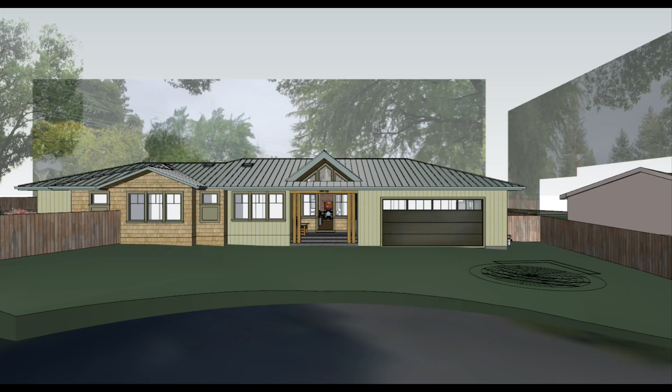I don't think there's really much different to see up front here because we did decide to keep the garage door centered on its wall, which I really appreciate. I have added windows at the top line of the garage. I think it looks really nice. And with this amount of light coming in through the garage door now, I feel...

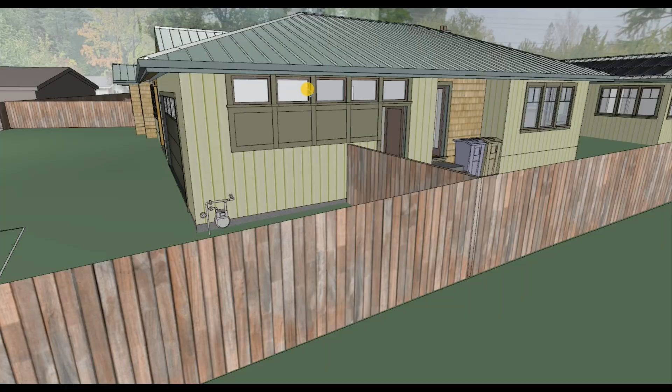like perhaps I went a bit overkill on the windows over here on the side. So I think I will probably reduce or eliminate some of these windows.

Yeah, definitely at least this one. So if we get rid of this one 32-inch window, these all should move over 16 inches to still stay centered, more or less.

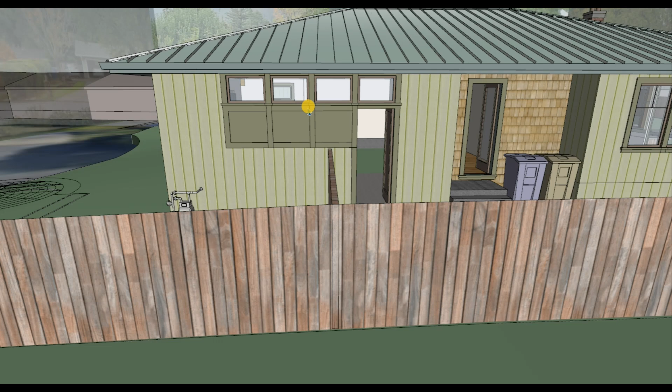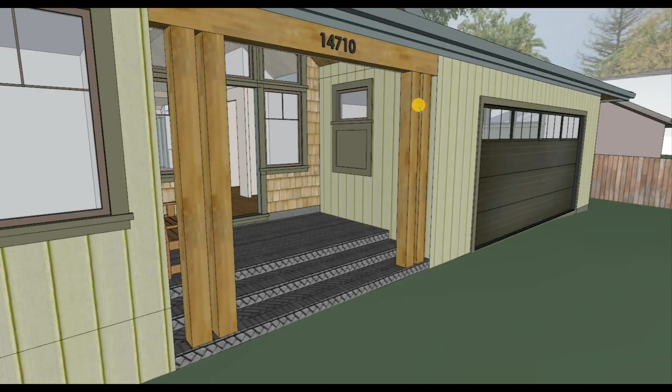So we'll have 4 windows there and 4 windows along the top here. I like that, and we still will have—again, maybe this is overkill. I will say now that we've got windows at the garage door itself, I don't really feel like I need to have a window here.

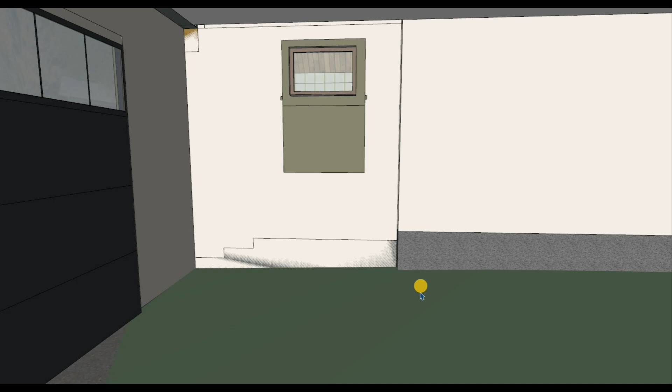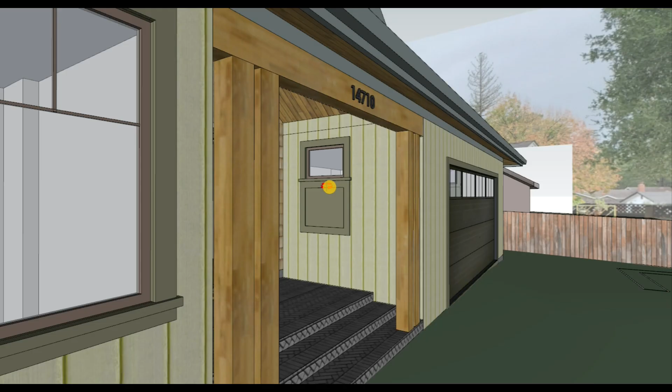You can be that lucky family that has a brightly lit garage, no matter even if the garage door is closed. But if you wanted just to have a solid wall there, that's doable. But for now, I'll keep that window in, unless you ask me to take that out.

I'm so excited about this approach. So nothing's really changed here, except for the fireplace is moved up to accommodate the other fireplace down below, which we'll talk more about.

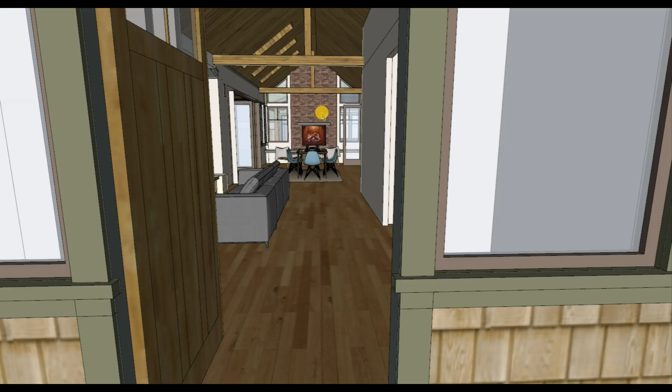But isn't that just a fantastic view? I'm really excited about that.

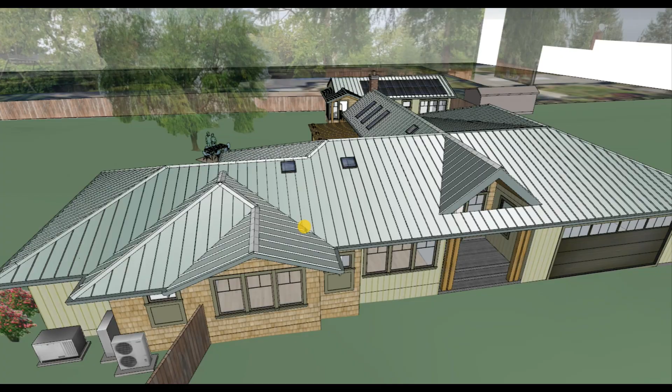Up front, we're also seeing the skylights. I neglected to add these in during the first iteration, but now I've got them in. Due to the roof geometries and me wanting to illuminate this hallway here with some natural light, I do think it's appropriate to have the skylights on the front-facing roof slope.

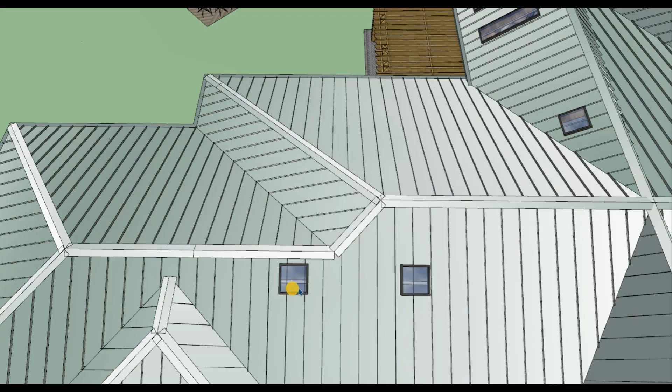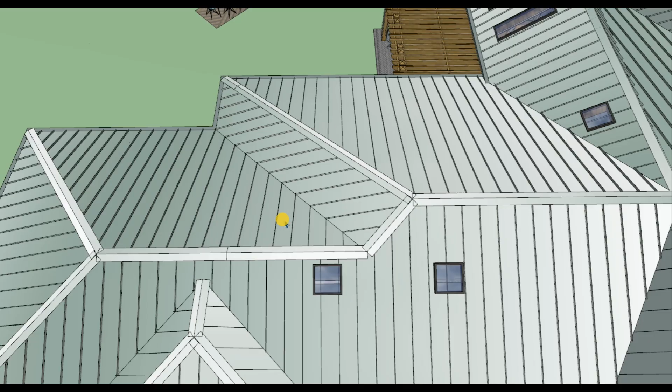I would have preferred to have them on the back, but then the geometries were going to be really weird. This skylight's right at the end of the hall, and I can't really fit it in right here, and I don't want to angle over to this flat area here. And then that angle would be different from this skylight being over on this roof slope here.

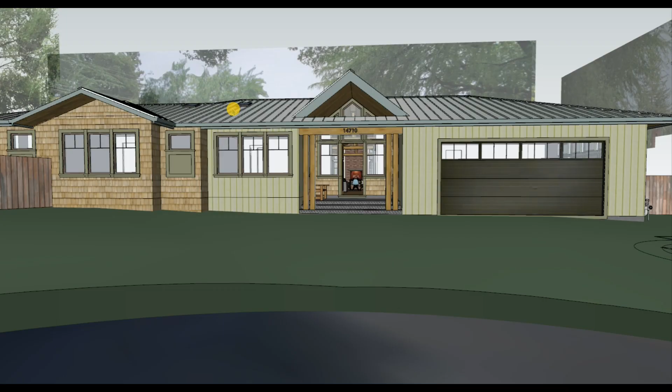So again, I think it's just going to look cleaner in the hallway, and it'll look right just to have those two skylights here. And I think once we see a tree here, a feature tree right here, I think we'll obscure those skylights, even at twilight hours where the hallway's lit up and you can see the bright spots on the roof plane. It's something I try to avoid, but I think it's the right spot...

for that hallway. Coming around on this side of the house, nothing's too different here. I've added a few bushes just to obscure the mechanical area behind your son's bathroom and your bathroom here.

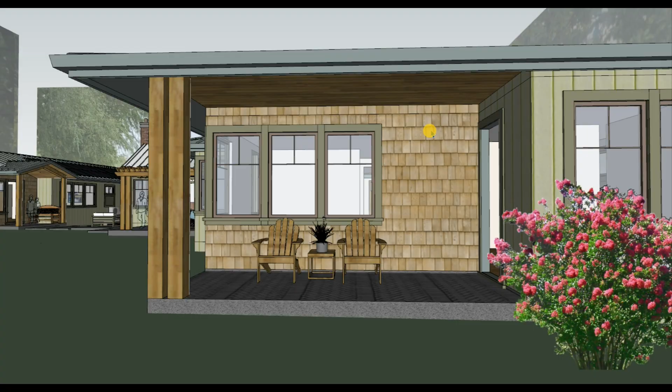I did eliminate the door from the master bedroom to the balcony. It feels like a shame to me. I get that you can get out here through the bathroom, but I just really don't want you to have to only go through the bathroom. I really wish we would have that door here still.

But if we opt to get rid of the door, I think doing a window arrangement like this will be really fantastic.

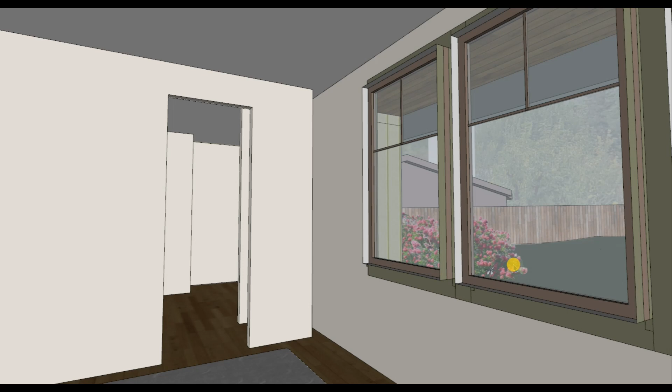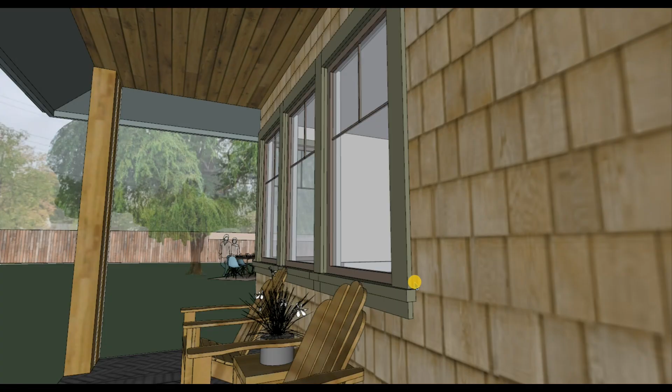And then I've closed off that door here to your office. But again, man, it's such a shame to not be able to get to this balcony other than through the bathroom. But here it is, if this is what you really prefer. It's not too much of a problem.

Now for some really exciting changes. So we're seeing the ADU in the background. We will get to that.

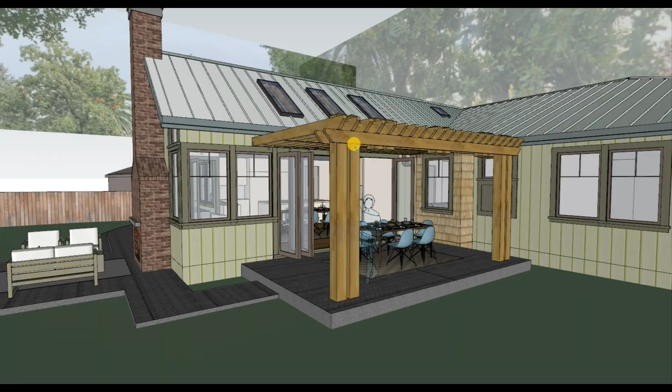But first, let's talk about this pergola request. I think this is fantastic. I think it's really nice to add this to the space for the dining room.

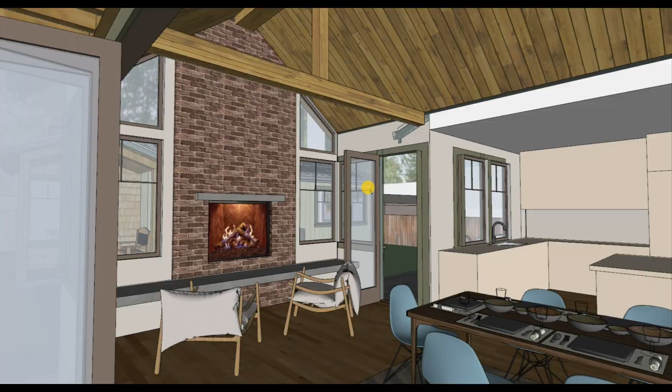And I am showing the reduced size for this fireplace area, just the corner windows meeting the door to the barbecue patio, and then the corner windows meeting at the bifolding door, still centered on the skylights.

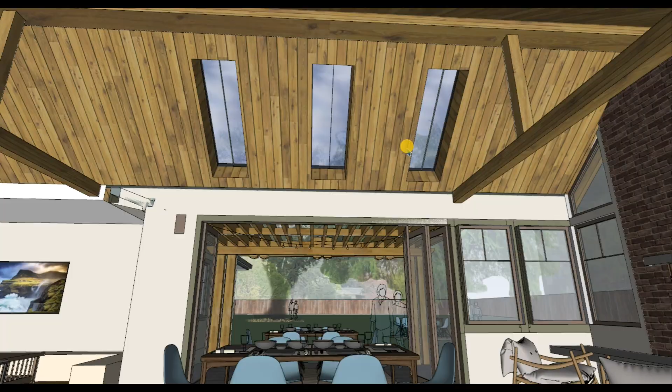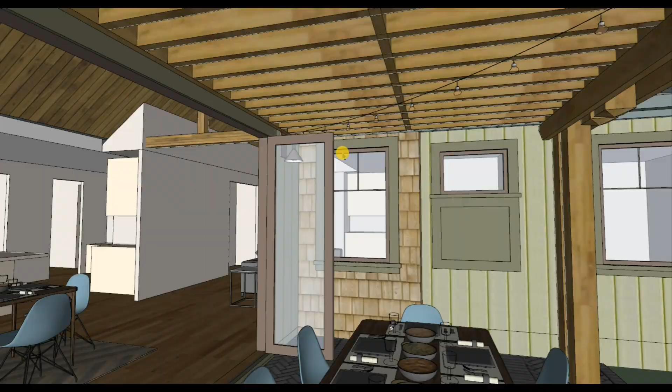And I really do think it's nice to have this pergola space out here. And I really do think I like the bifolding doors for you.

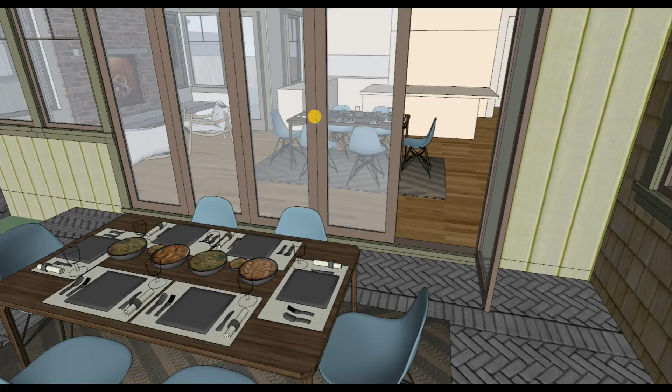I know I gave you in the email quite a bit of a rant about the ratio of glass to frame and how relatively narrow these doors are relative to the sliding glass doors. But to be honest with you, all things being equal, this looks fantastic to me still.

This is perhaps a bit busier than the alternative, which would be—let's see if I've got it here. I do, good. Here's that sliding glass door. It's maybe a little bit in the wrong position now that I've smushed things in. But a sliding glass door does have narrower, slimmer profiles for the frame, and the panels themselves are wider.

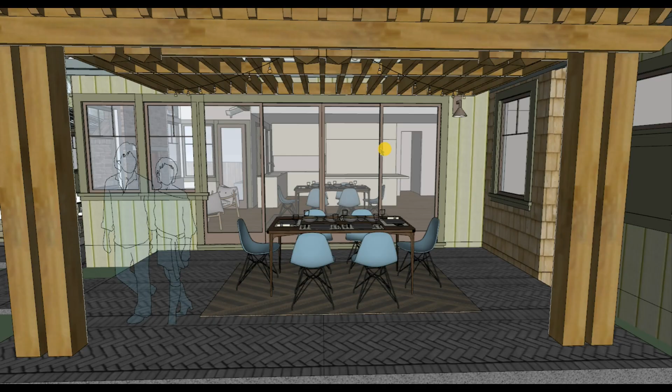And so this is just a lot more glass. But to be honest with you, the other option looks pretty good to me. I'm surprised how much I liked it.

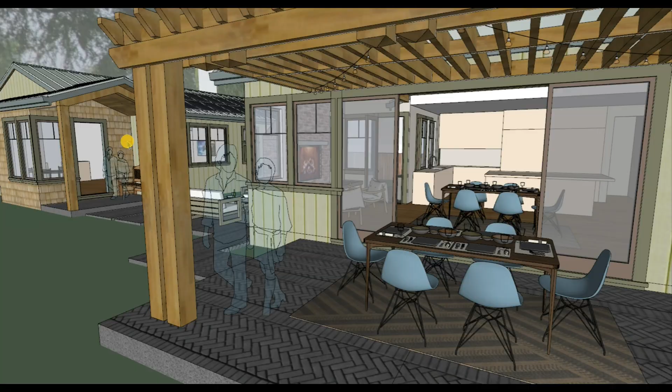And so the sliding glass door is still here if we want to look at that live together. But again, I think I'm really excited for you guys to try out this NanaWall.

Now, there is still this thick stack of panels that do collapse at 90 degrees. It collapses into a flat stack over here. It's a bit of a bulk, but it's not so much in the way. You've got a big enough patio that you'll be able to get past that. I do really like it, and it's great to have this one single panel here that you can swing open.

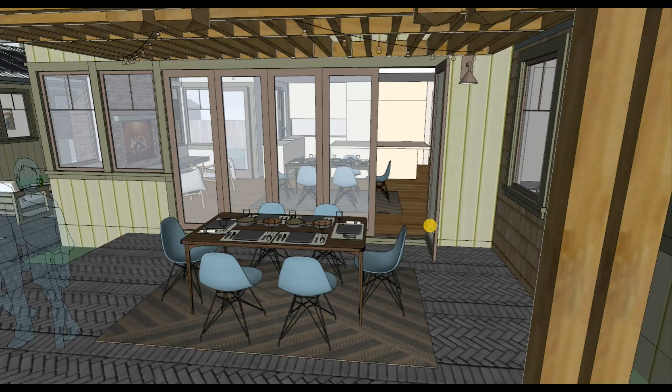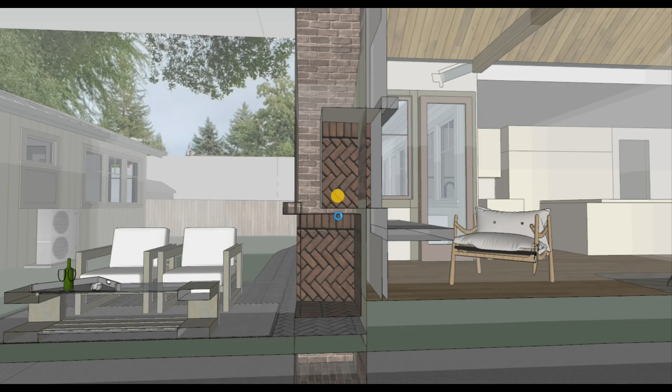And then, the idea of putting a fireplace below the other does seem allowed. I didn't see anything in the installation diagrams for this fireplace that seemed to preclude being able to do something like this. I'm showing the zero standoff option for this upper one, although the lower one - and again this is really getting into the weeds here - but it does seem doable to stack the fireplaces.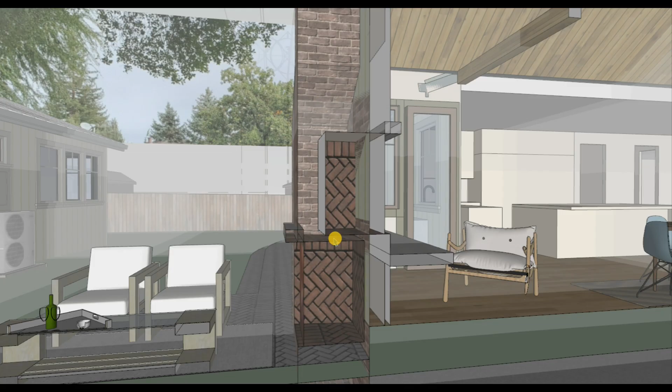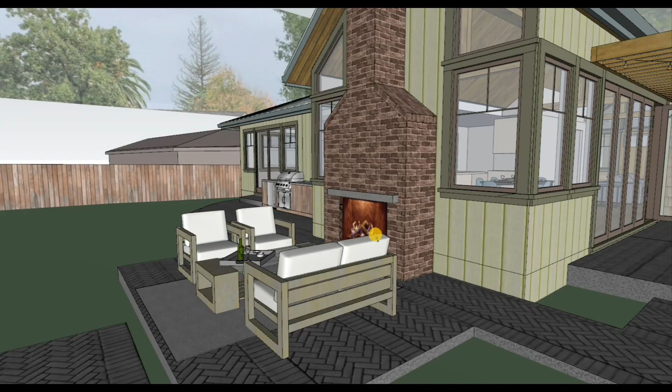Maybe this upper fireplace will have to move up further if I've misconstrued how the venting has to happen. If the vent has to come out the top, then we'll need room to divert that over to the side and route up and around this other upper firebox. But I think I'm digressing a bit. I think it would be possible, and of course we can always pick slimmer or shallower options here. But again, I do think it's possible.

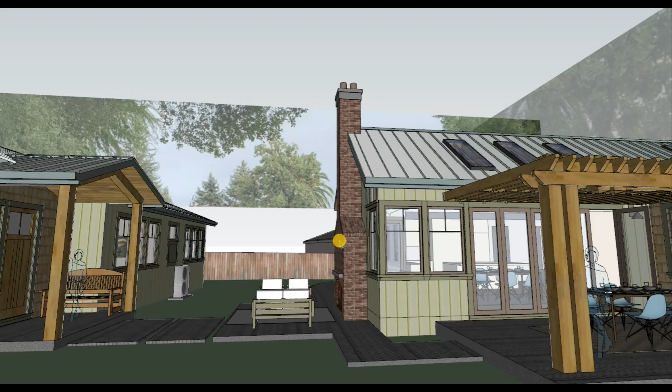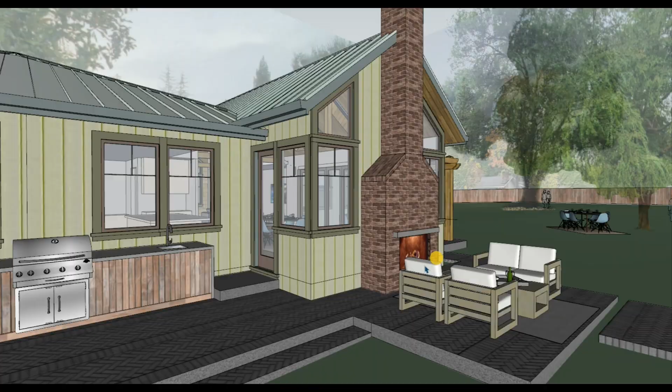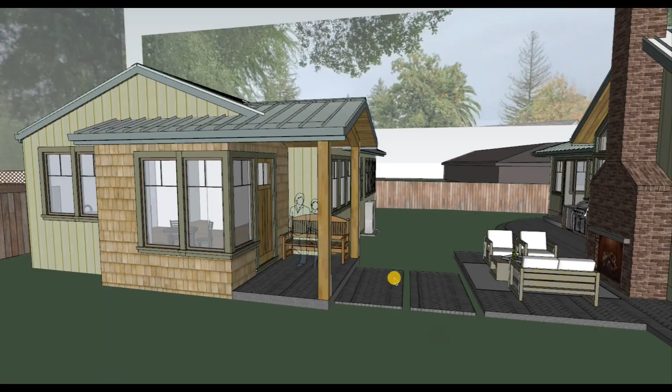I don't think there are other changes to the main home, but I do like this space here. I really do like this double-sided fireplace, especially when we see it as part of this ADU entrance experience. When you are coming out of the ADU door and you're seeing this elevation, I think this is really, really inviting and a fantastic space. So I'm very floored by this request, and I think it is doable. It might take some more fine tuning.

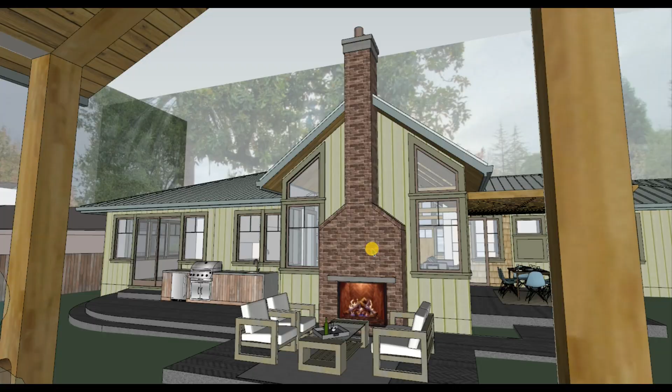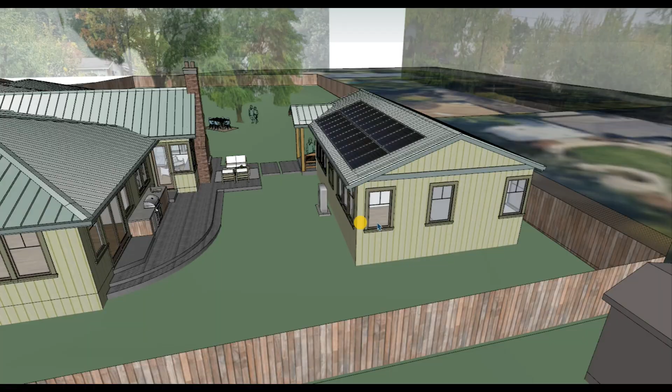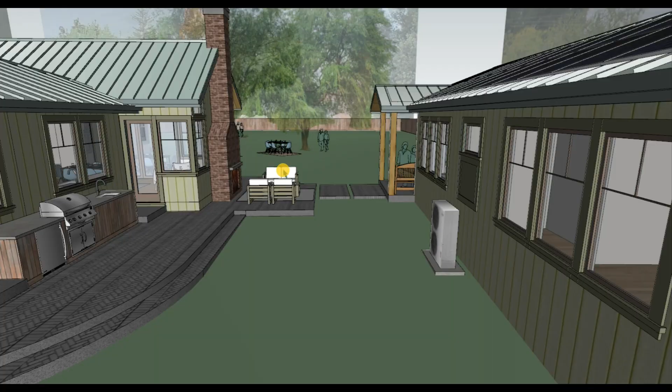But then the ADU itself is, I think, really, really nice. I've simplified it. I have opened the site plan up. This is now aligned with the rear property line, and it's 2.6 degrees off from truly being parallel here. It's hard for me to tell in my 3D model here that it's not parallel. I think it might be possible to tell in reality that they're not parallel, but that's okay because this thing is parallel with the fence line, and I think it's going to be okay.

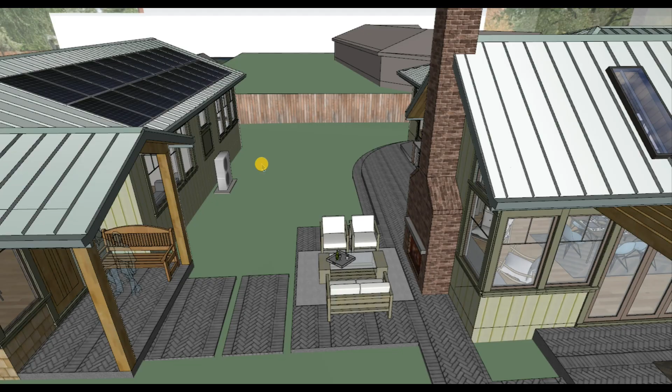And I'm also kind of happy - I thought about this as an ancillary benefit. When you have two parallel walls like this, and how far apart are these? These are 30 feet apart. You might get some bouncing echoes between these walls if they were perfectly parallel. But now that they're angled, that's less likely to be an issue. So that's kind of nice.

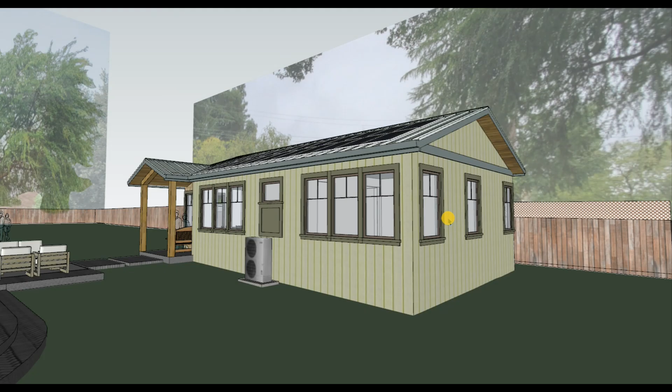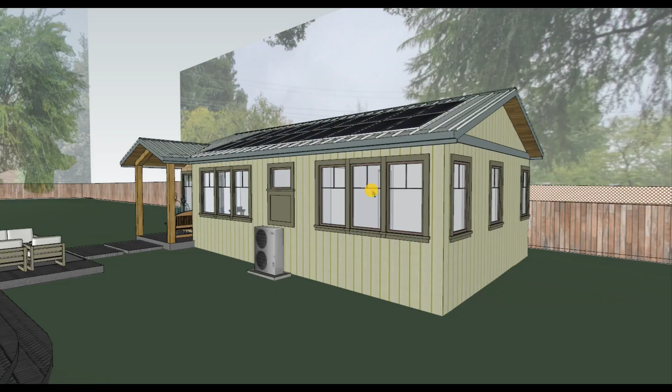But this ADU space feels great. We've got the bedroom over here with three windows along this wall and two along the back wall. It's a very brightly lit space. I could see you maybe wanting to save some money and not do so many windows, or maybe do some higher windows along this back wall rather than these full height windows. But if that's the case, I'll gladly show that for you. But I do think that you're far enough away from the property line, and we've got some nice trees. I think it would be nice to have some full height windows here on either side of the bed.

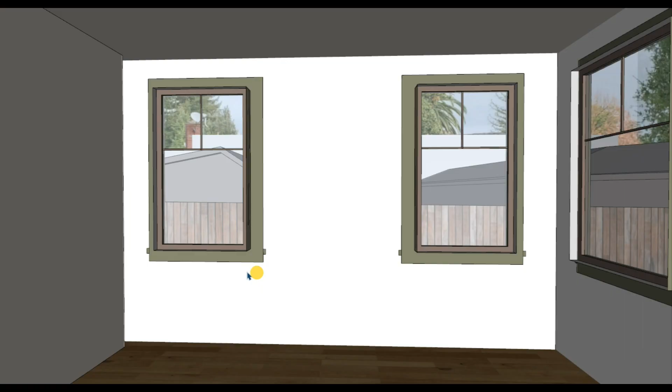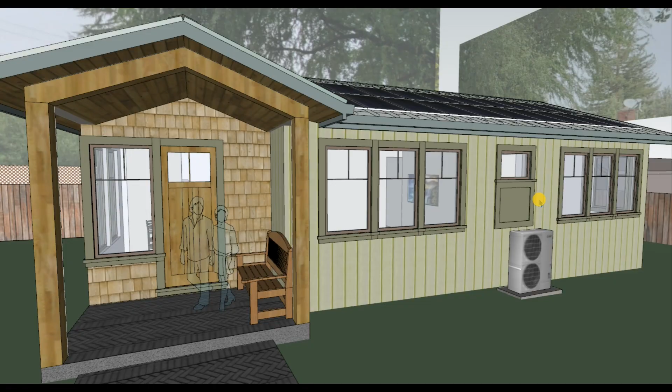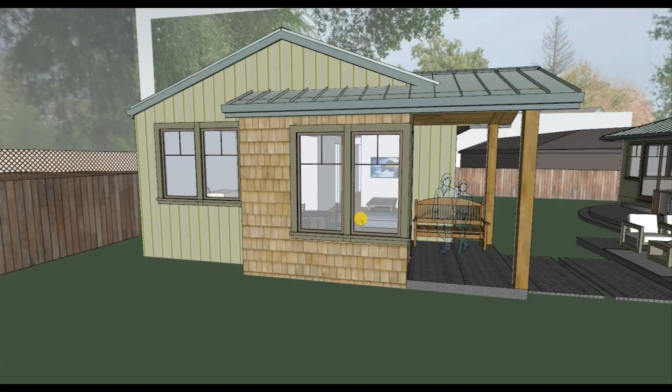And then we've got a high window in the closet, HVAC unit centered underneath that, and then a matching three windows here. So I really like this elevation, 313. Three windows here for the living room, and then corner windows here at the entry and the dining area. A couple windows for the kitchen, and just on this wall. I don't think that with the upper cabinets and the cooktop hood and the tall fridge that it makes sense to try to fit any windows on this back wall. But oh man, look at that view, right? This is really fantastic.

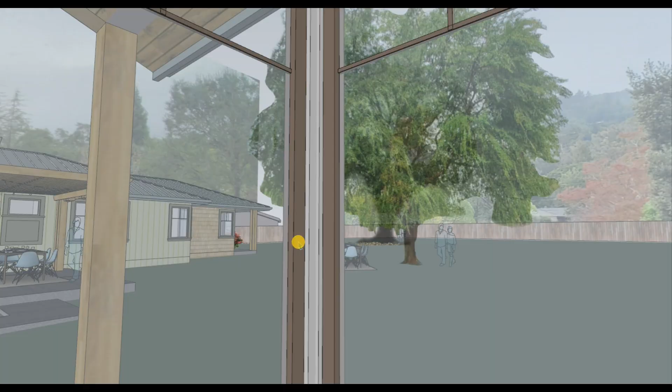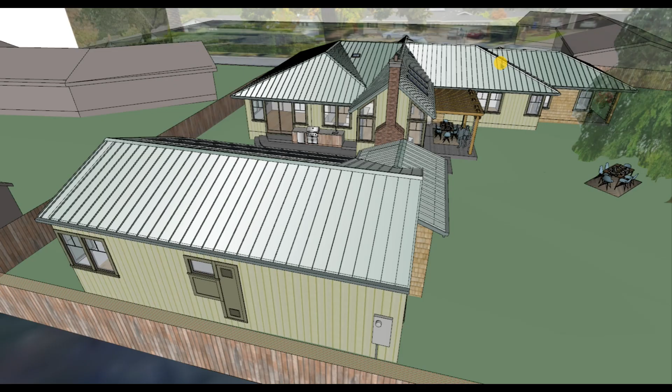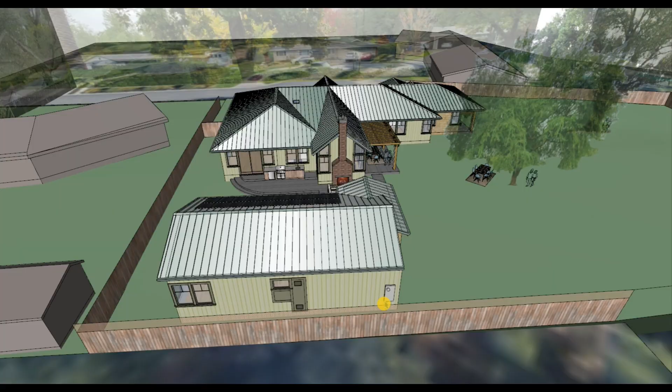And then I'm thinking, and I need to run this by Saratoga - I think it'll work because if we can have the main electrical meter on the main house feed the ADU, why can't we have the electrical meter on the ADU and then feed to the main house? I think that's the smart way to go. We'll put the one gas meter here at the front where the gas comes in, and then we'll have the one electrical meter here being fed by the utility pole here. And that should, I hope, lower some of your utility trenching costs.

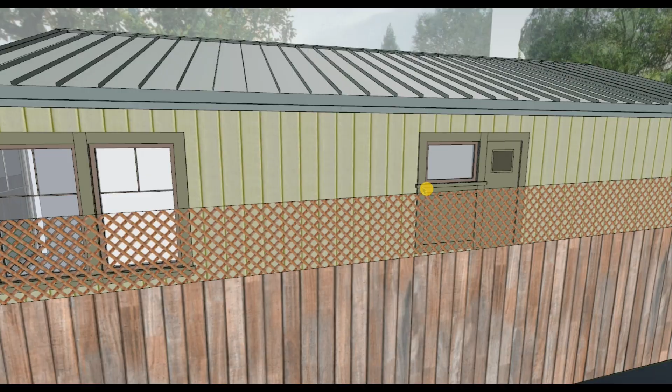Not that that's too much to worry about, but anyways, it's also a good use of this blank wall space. Rather than trying to fit this meter - gosh, where would it have to go? Probably somewhere over here now. That's terrible. Let's put it on the ADU. And then along this back wall, we don't have much. We have a water heater closet door. We also have a bathroom window, high window for the bathroom. And then we have three windows here at the secondary bedroom or office space.

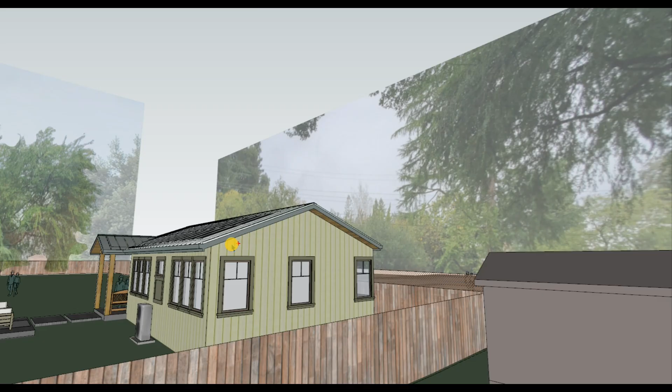And this trim piece is not necessary. We could omit that trim piece and there would still be blocking along the top plate of the wall here to support any future shade element you wanted to add. So you don't need this trim piece, but it is nice and it does break up the gable height wall a little bit.

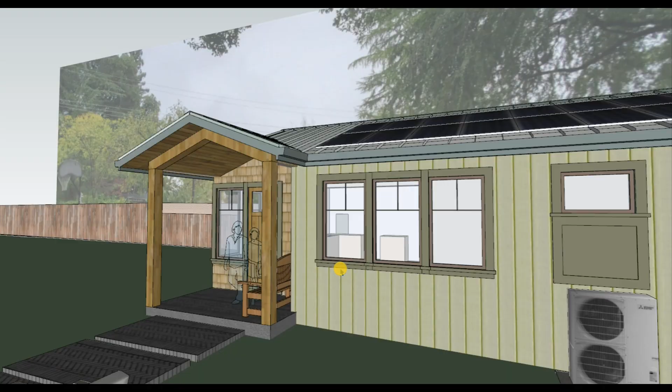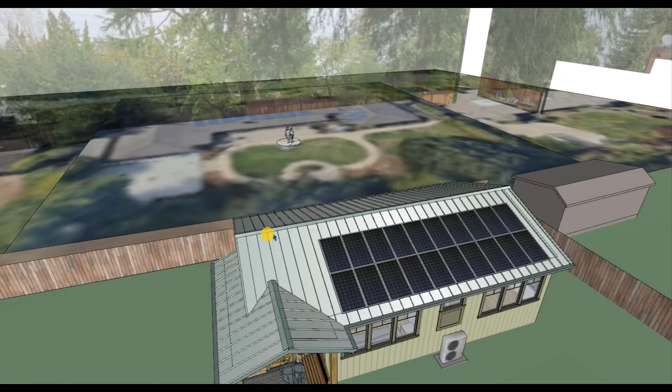The roof for the ADU is pretty simple. In the spirit of simplifying everything and matching the simplicity of the roof we have here, I thought just two simple cross gables would be perfect. A main gable over the main home, which does allow for a vaulted ceiling still in the living room. So we've got some nice features in here, plenty of height.

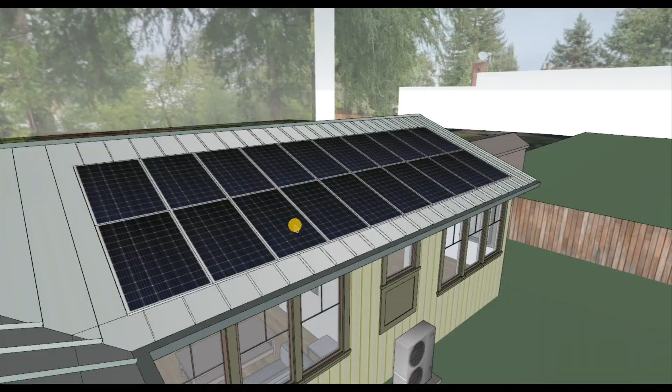And then a cross gable here to cover the entry porch and the dining room pop-out space. It looks simple, looks cute, looks really nice. And the added benefit of having such a simple roof is that this south-facing roof slope is just so perfect for solar panels. I'm really happy about that.

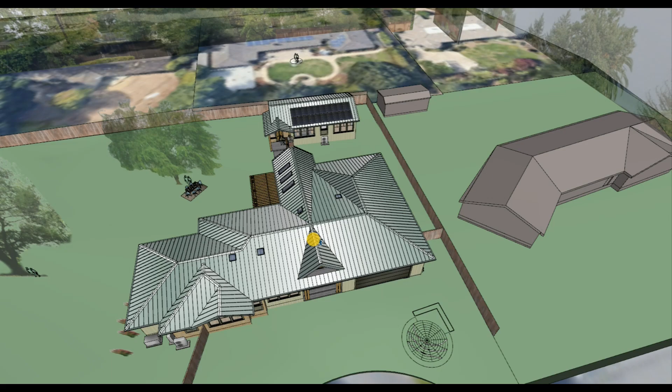So here's our southern sun coming in, and it really wants to hit this roof slope here, which I do not want to put any solar panels on, please. But oh my goodness, look at this perfect, unshaded, south-facing roof slope that we can just jam-pack with as much solar panels as we want.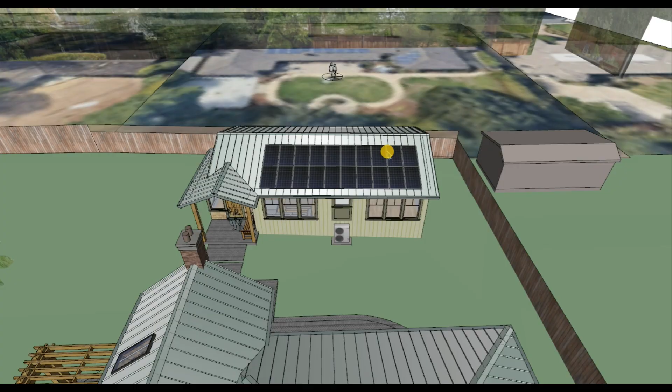I'm showing here probably more than you could need, I would think, but we'll see. That's up to the solar panel manufacturers to calc the numbers with their actual panels. But by putting them all here, I think we can clean up this roof and not have to have those few panels on either side of the skylights, which makes this roof plane a little cleaner.

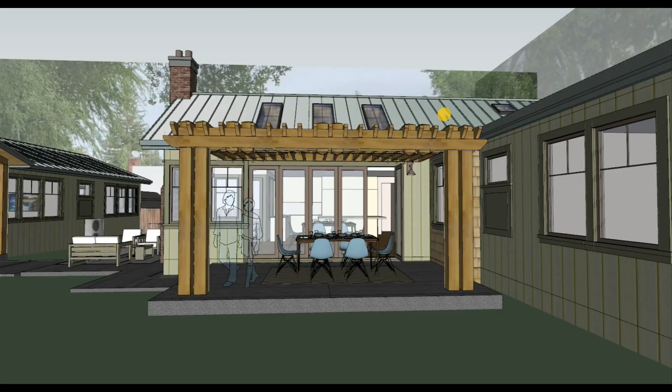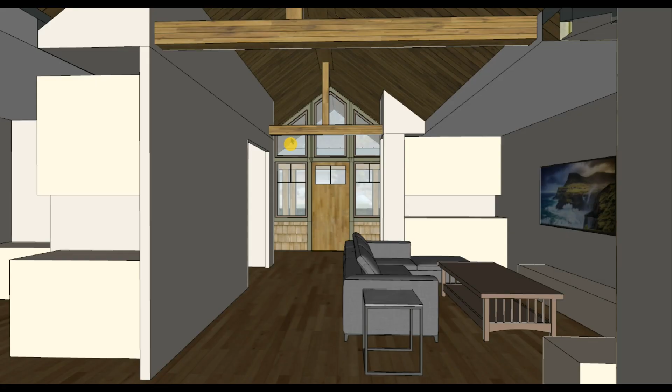Oh, and then I am showing one more skylight, tucked over here, that is meant to bring light down into the center of the space. I'll probably widen out the opening in the ceiling when I get to that during the next phase of work. But for me, I think this space has enough natural light.

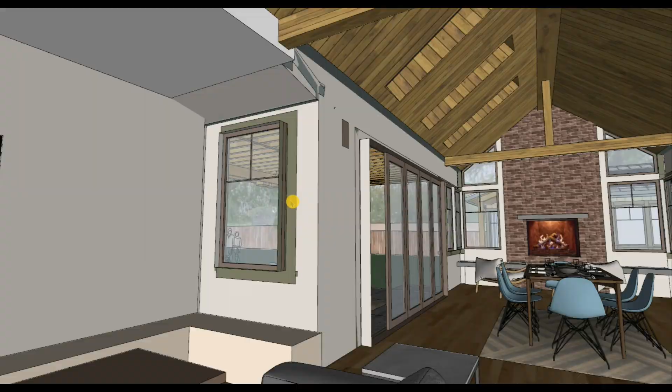We've got a window here. We've got access to all this light coming in from ancillary spaces. Maybe we don't want a skylight in this space, but if we do, I can make it work. And then we've got a skylight here on this cricketed area, which will bring light down into this homework area next to the bathroom.

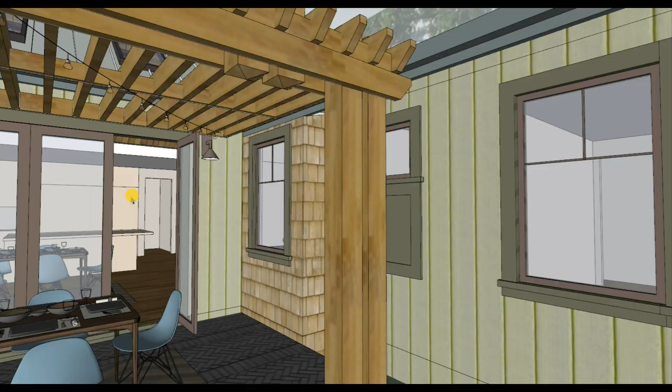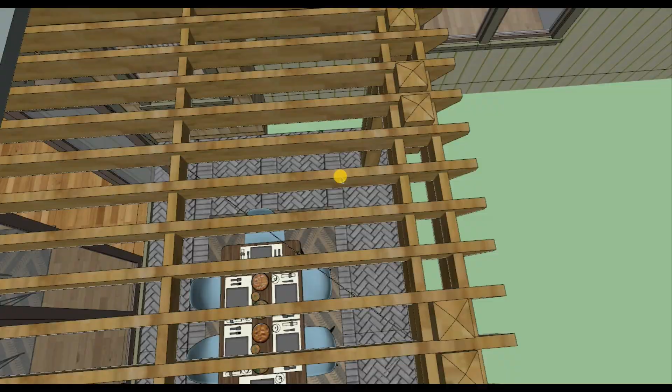Now, talking about the pergola here, the height of the pergola right now is not so low. I mean, it's over 8 feet tall. And when it comes to open shade elements like this, the lower it is, the better it is to shade you. The more likely you will be to be shaded by the element and not have the sun undercut you or undercut the shade element.

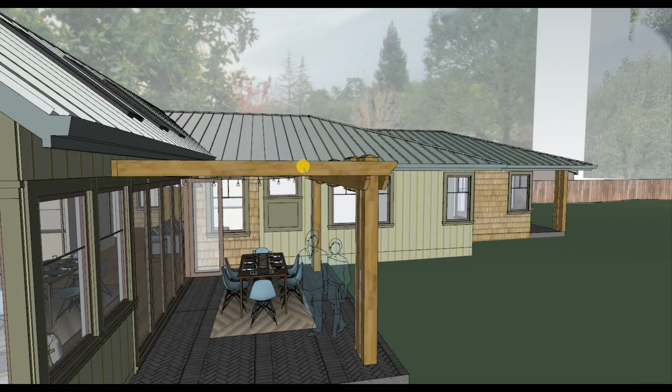But it is rather low because I don't want to compete with this roofline here. I could, and I did look at alternatives where we raise this up by a couple of feet and have it supported by a couple more posts. And honestly, I felt like the added height wasn't really doing anything for me.

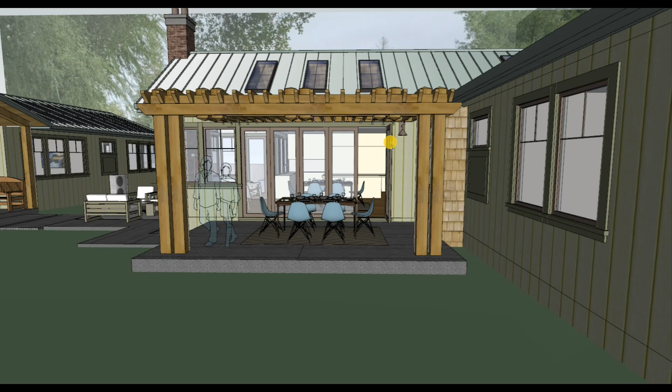The posts were really interfering with this window here looking out to the backyard. The post would just die right here to avoid these bifolding doors. And so in the end, I did think that going just with outer posts and ledgering the pergola onto the back wall here underneath the overhang was the right way to go.

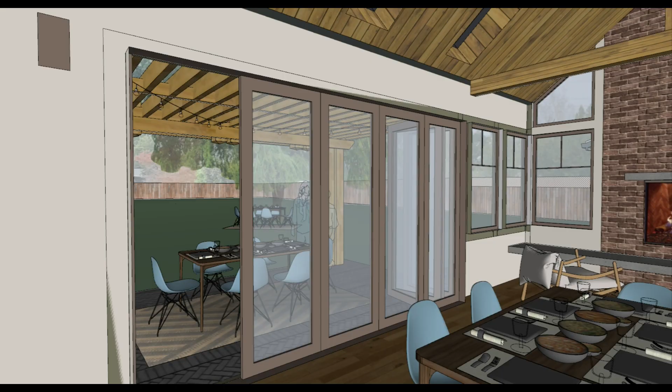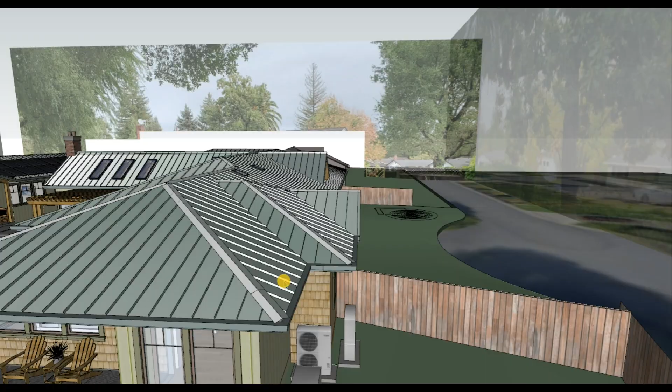Well guys, I hope I've made it clear how much I love this new design. With the one caveat, I really want a door right here onto your private porch. But other than that, like I said, I am really, really happy with this design.

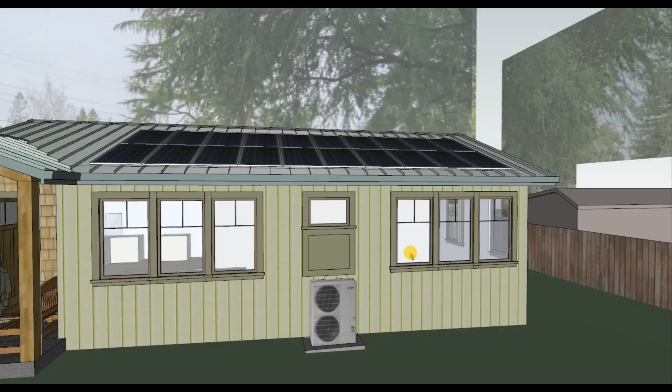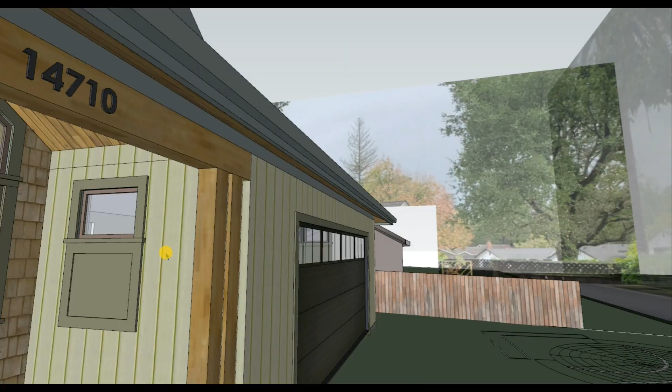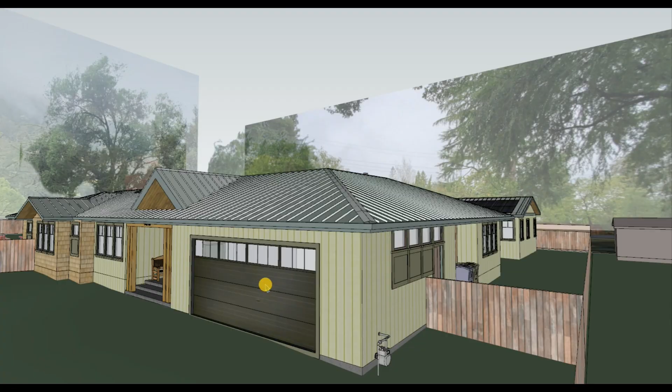And let me know what you think about these garage windows. I'm all about natural light. I feel like in the past you were quite okay with having a dark garage. I remember when this door was on the side and it was solid, to avoid getting hit by pickleball and all that. But back then we were okay not having any light in the garage. So now I feel like I've gone the exact opposite, and this is an enviously lit garage. Let me know what you think about that.